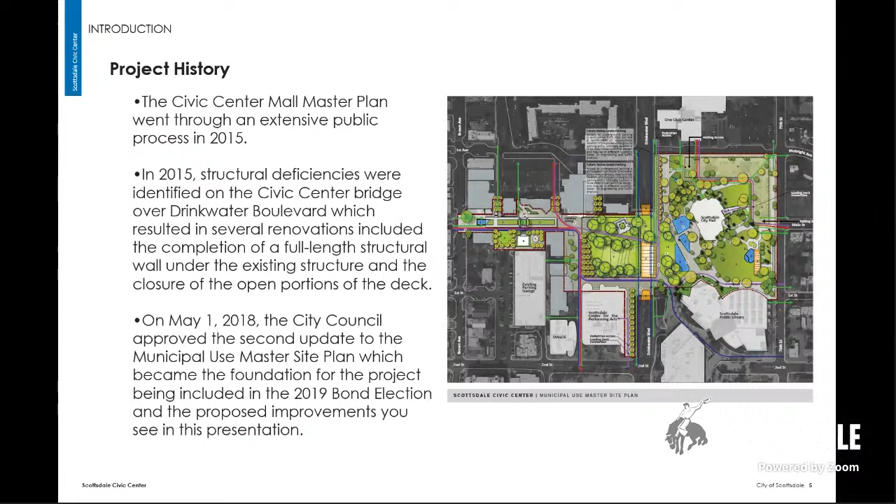Again, I apologize, we'll say next quite a bit in this presentation because there are a lot of slides, but felt it was important to give a broad overview of the project. From that municipal site master plan, there were principles that came out of that community engagement that we carried forward as design goals for this project. One was really to honor history and understand the significance of the current plan, of the institutions that call the Civic Center home. That includes the Scottsdale Historical Museum, City Hall, Library, Performing Arts, and all those institutions. And then combining this new infrastructure to support what will become an entertainment destination and a daily use park. Next slide, please.

I think this plays into the historic aspect of the park. When you try to understand a space that's existing, it has a life of its own already. It's important not only to look at what needs improvement, but also what's working well and what can be built upon. Our design team started with this approach of preservation and then enhancement, and then areas that can be completely transformed, really building on the great infrastructure of trees and architecture that exists on site.

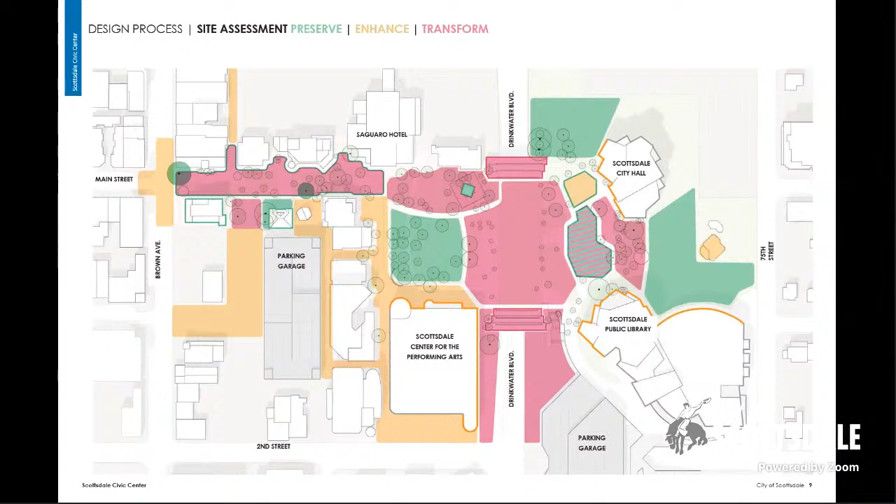As we looked at these study areas with the adjacent context and program, we broke the site down into 5 study areas. We'll briefly go over each one, and at the end we'll touch base in a little more depth on the West Paseo.

The West Paseo is that connection from Main Street into the West Bowl. The West Bowl is that area and lawn just north of the Center of Performing Arts. The Civic Lawn spans over Drinkwater Boulevard Bridge, adjacent to City Hall. Then a new family amenity area called the Social Hub is stitched in between City Hall and the Public Library, offering more family-focused daily activities. Finally, the East Bowl along North 75th Street is that performance and entertainment destination.

Just quickly to touch on the framework of the plan, it really took influence from these institutions that surrounded the Civic Center, engaging it with three main programmatic areas that played to the program and how to extend those institutions out into the space.

From the West Bowl with its connection to the Center of Performing Arts, the East Bowl with its connection to looking out the windows of the Scottsdale Public Library, and then the Civic Lawn that works to engage and tie together the civic nature of City Hall, the public nature of the library, and the art and cultural aspect of performing arts.

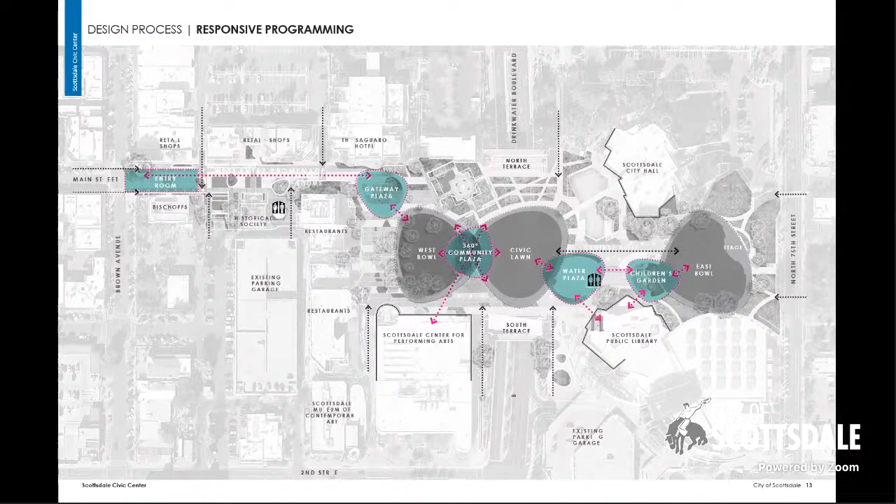From there were these other layers of program that responded to community desires: a children's garden outside the library to bring daily activity, water plazas, and community plazas that could be programmed in a variety of ways. As it pertains to the West Paseo, this entry room allows people to be pulled in from Main Street to create a gathering spot at that node.

Built on from that, around the Historical Society, is this extension of other adjacencies — looking at potential expansion of green space where that current parking lot is, where the schoolyard rectangle is located, and offering a formal gathering space outside of the museum steps, what we're calling the square.

As you get into the bigger park area, we're really reimagining that Marshall Gardens area with a Desert Southwest overlay, showcasing our native palette within the Botanic Gardens, and other social gathering areas that are adjacent to the institutions.

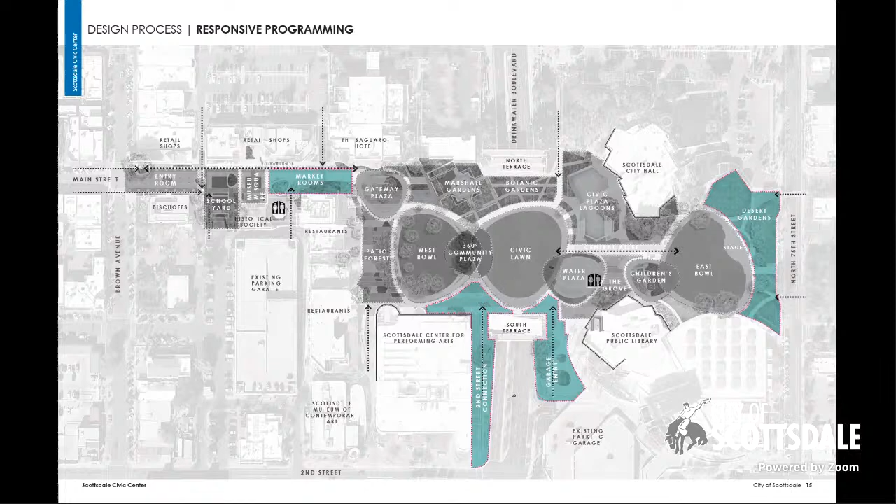From there, it was about connecting out. One of the main goals of this project was to increase those connections, both internally, but also enhance access externally from the park, both to the east, west, and also to the south, to the existing parking garage and 2nd Street.

Here you see the plan in its form as it currently stands, with those three programmatic areas anchoring the park. Their shape is taken and pulled from the turquoise gem, which relates into the arts of Old Town, allowing us to be organic with our moves and really respond to a lot of the existing elements that are out in the space.

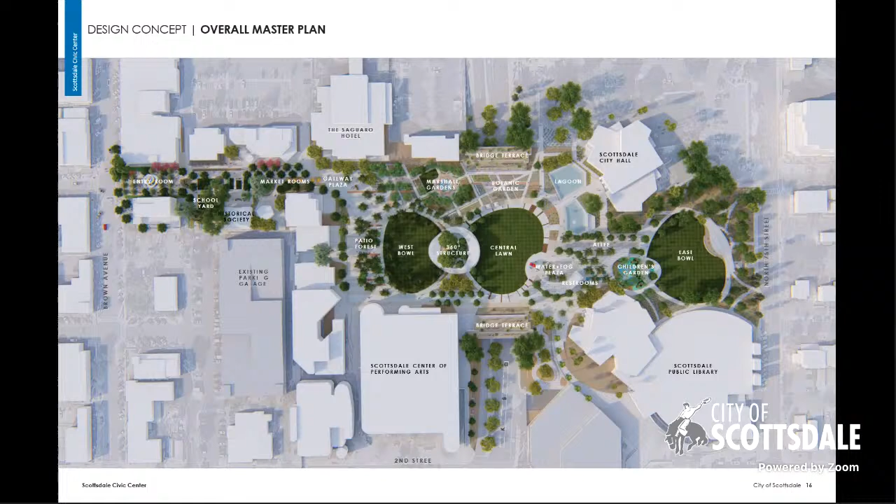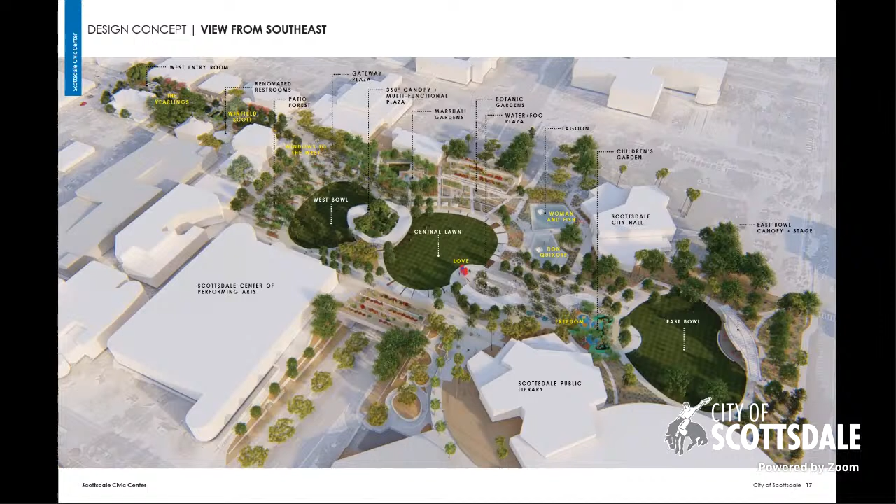Here you can see a view from the southeast looking to the northwest. It's a little hard to see on the screen, but we're currently working with Public Arts as well, looking at the refurbishment and relocation of several of the sculptures that exist today, as well as working with public artists on a bridge installation underneath the tunnel.

You can see here that the Winfield Scott Memorial is kept essentially within its same location and adjacency to the museum, actually aligned and centered on the doors. The yearlings are similarly located, just pulled back so they don't become a barrier, but instead create a focal draw back into the park.

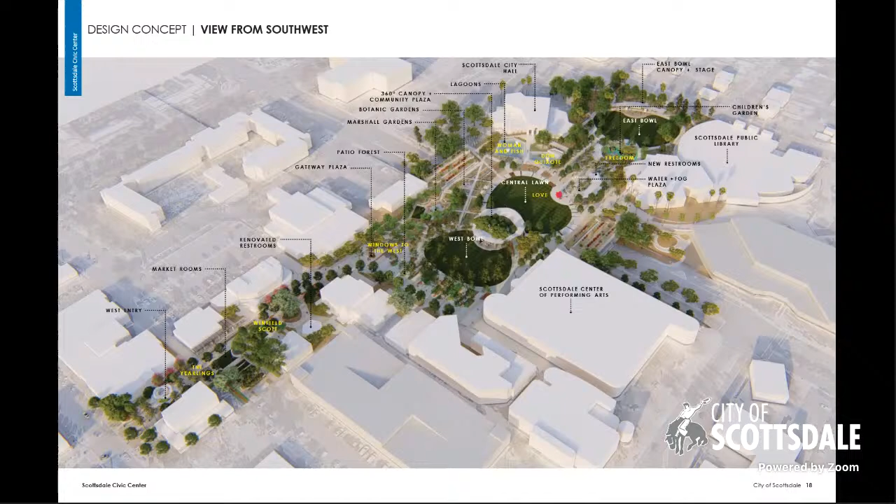So the West Paseo, we'll touch on the design goals here briefly, and at the end we'll get into more detail around the historical museum. The design goals for this space were really about increasing access, both visual, so from the corner of Main Street and Brown you understand there's a park beyond, something happening within the space, and that it would draw you in.

So the big move here was to really lower the grade, bring it back to its original road grade or parking lot, so as you access in, you're not met with ramps, barriers, or walls. You have clear and free pedestrian access. It also opens up a lot more opportunities for programming, from markets and festivals, to speaking engagements and lectures off the steps of the Historical Museum.

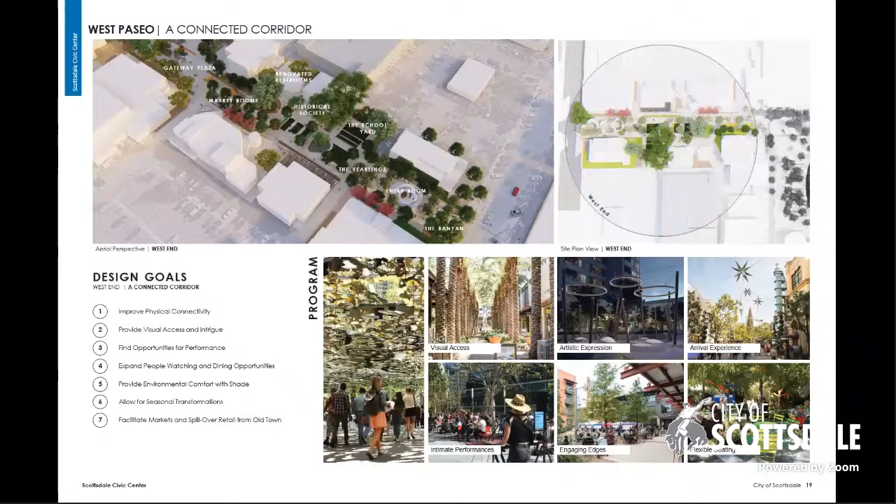As you move further east into the park, you come to the West Bowl, which was really about preservation of an amenity area that's working well. It's got the large forest of trees, a beautifully sculpted lawn, and this nice adjacency to the performing arts with that program relationship.

And then with the Marshall Gardens, it was taking that geometry and really working with it, but having this Southwest desert overlay to bring it to life, add more vibrancy and color, and showcase that desert palette. In the center, you see a 360 structure engaging with those existing banyan trees that anchor the center of the site, creating a dynamic community space right in the heart of the park that can activate the West Bowl, activate that civic lawn, and also create a great internal gathering area.

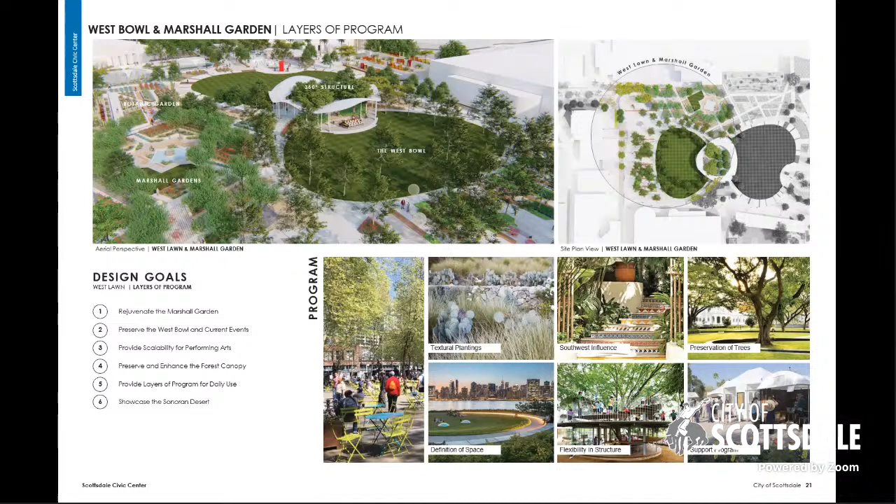Here's a shot of that Marshall Gardens with the step down. We were, within this design, opening it up to provide better visual access for this area, as well as better physical access.

So as you get to the civic lawn, this has that overall bridge connection over Drinkwater that stitches into City Hall. As you can see in the foreground of that upper picture, the lagoons are kept to maintain that view up to City Hall with the bridge, but they are reduced in size on the south.

That's twofold: one, water conservation was a big part of this project, understanding how we could reduce turf area, reduce the water feature, and solve maintenance issues through this project. That also opened up a large area south of the lagoons and north of the library that could be occupied with more community amenity areas like splash play, a reading garden, and a playground.

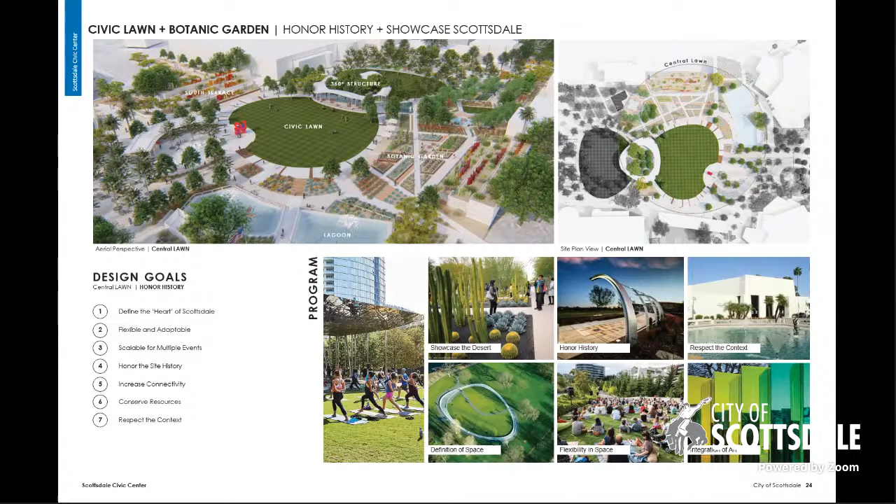So it has this formality that links and connects the east portion of the park to the central portion, which was a goal of the project, to make that connection a little better, because right now, with the grading and that bunker-like restroom, you're a little lost in understanding that an amenity exists on that side of the park.

So here's the social hub, really building off of the program of the library and letting that extend out into the space to become that great family gathering area. The library is looking at having that back entrance turned into a permanent entrance that spills out right into the children's garden. The children's garden would have a reading tree area, a place to grab a book and lounge outside, and have story times and those types of activities occur out there.

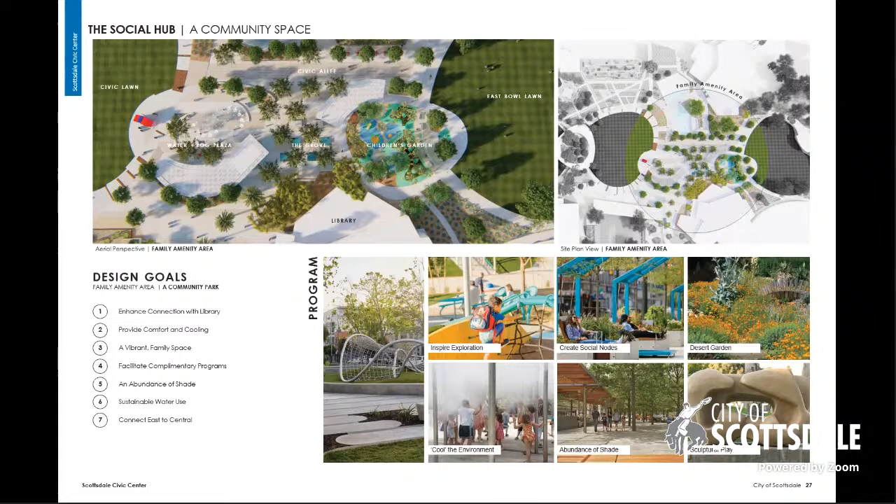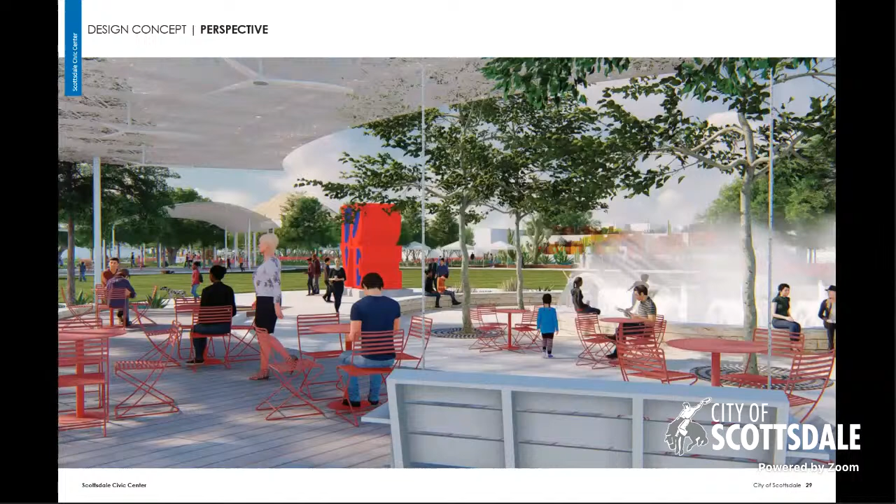And here's that spot underneath the shade structure with the water plaza to the right. You can see the terraces - we're looking at creating artistic bookends on those terraces that exist out today to bring some of that color and play with the great sunlight that we get in our Arizona desert. Here you can see from this vantage point the connection of the splash, the love statue, the 360 structure, and Camelback in the distance.

And finally, over at the East Bowl, this is really about creating permanence to a program that exists out there today - replacing that temporary stage setup with a permanent stage and canopy, transitioning from water use with the existing water feature to water collection. This whole entry off of 75th will be transformed into a more native desert palette. The performance canopy is actually designed to capture and collect water, filter it through the landscape, and become an educational opportunity for residents and visitors to understand water use within our climate.

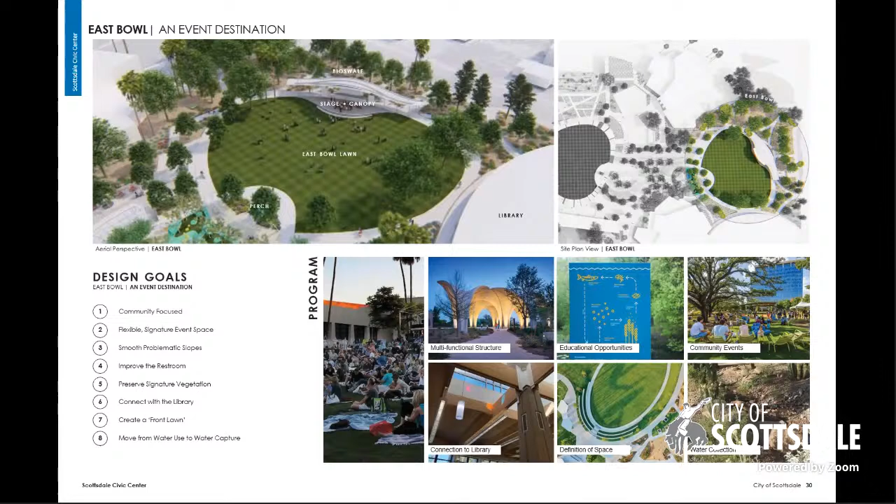There's also special attention paid to the scale of the space, as it's acting as a performance pavilion out to the green and towards the library. But on its backside, the 75th side, it's designed to not have a back - it scales down to the neighborhood to create a nice entrance experience that you walk through as you enter into the park.

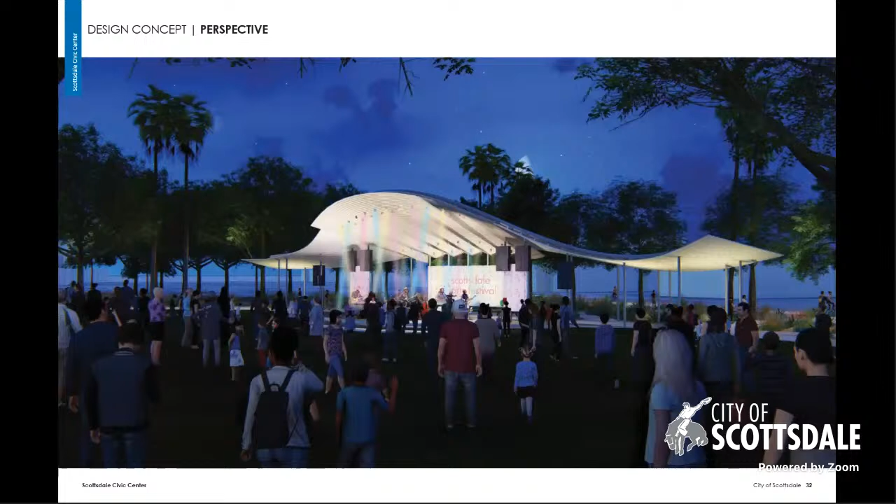And then it has this ability to transform from that daily use into this entertainment destination that can support those events. All right, so that was a quick overview of the entire thing.

And like I said, I apologize if I went fast. There's a lot of detailed information again, and happy to answer any questions after this presentation as well.

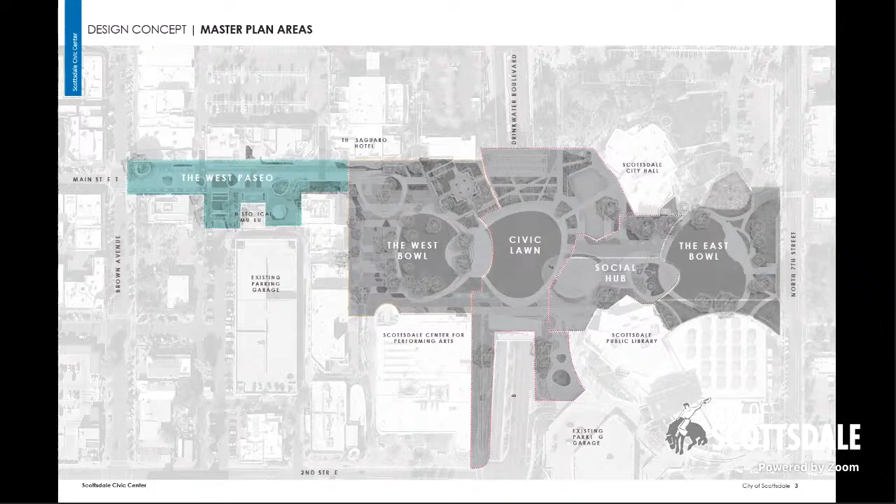But diving into the West Paseo - I apologize, some of the text looks like it's a little off - but this captures again that area from Main Street and Brown into the West Bowl area, and hugs the historical museum.

Here's an enlargement plan of that zone where you can see the Scottsdale History Museum with what we're calling a little museum square out front of the steps. This whole area is flattened, and the Winfield Scott Memorial remains in its place, but actually centered on the doorway.

There's an opportunity for expanded green space over to the west of the museum. The existing large trees right now will remain, that large eucalyptus to the right, and then the three large trees that kind of frame that schoolyard space.

And then what you see off of Main Street and Brown is this idea of an entry room, pulling that new Main Street landscape palette into the west corridor here, and creating a place to gather, a place for small performances, for buskers, for that daily activity that activates it, and those seasonal transformations that occur. So having seasonal lighting, having a place for the tree to set up, all those types of things would happen within that entry room.

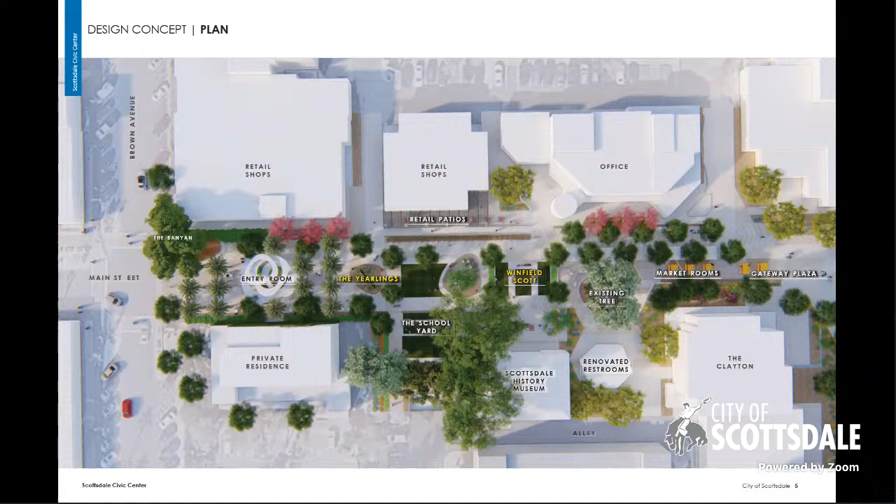And then you can see the yearlings also kind of pulled back, so still a visual draw from Brown and Main Street, but then also a nice connection from the steps of the museum, and also a nice visual tie to the parking lots to the north and south. So it's something to draw you in and welcome you into the space.

Next slide, please. Here you can see diagrammatically how those programs set up. You have this nice promenade that cuts through, that can be transformed into these markets and these different festivals. Given the new simplified ground plane, it really does allow for better tent setup, better vendor setup, better setup in general for those weekend activities. There will be Wi-Fi throughout the park as part of this, as well as plugins to help facilitate those vendors and those types of activities.

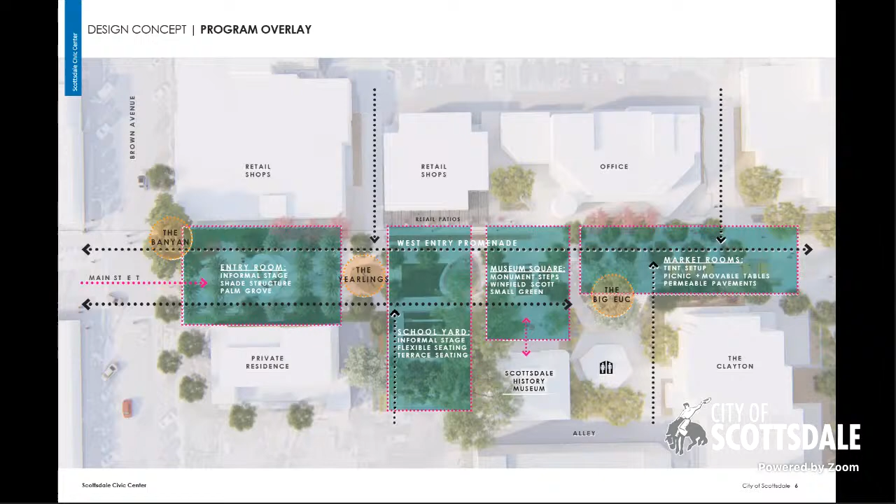Next slide, please. Here you can see in perspective how the museum fits into that space with these turquoise-shaped planters that dot through, that either highlight an existing tree, showcase a desert palette, or provide a place for art to sit, as you can see with the yearlings.

And then there's this little formal square out front of the steps of the History Museum that provides the area for tent setup and those lecture and other types of events that occur out front. And even with those steps, there'll be two ramps that flank the steps, allowing access from both the east and west, and allowing an accessible entrance up to those doors.

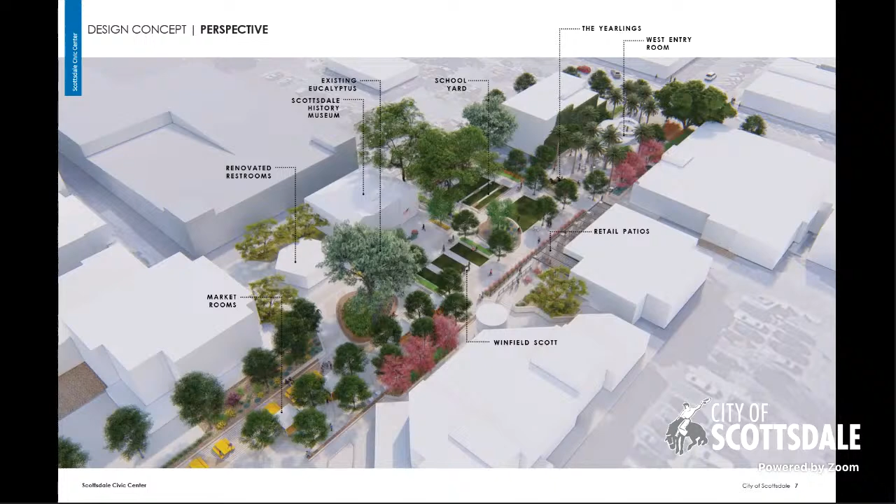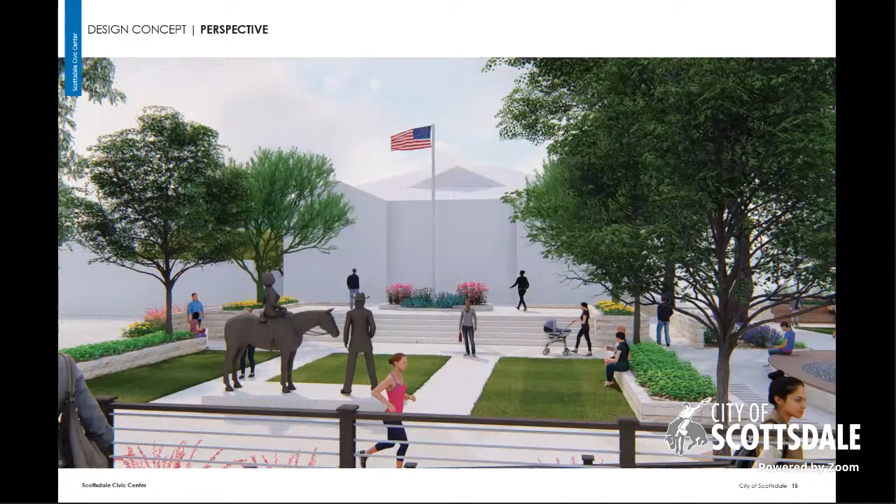Next slide, please. Here's a shot of basically standing over by the interior design store and the wine shop across the corridor, looking back at the museum with those steps up, and you can see on both sides you have ramp access that go up.

We were able to meet with a couple of the museum staff and committee members. I'm not sure if any of those folks are on today. And we were able to show, through visualization, how this would appear and how this would be transformed.

So from today's grade, you can see how this drops down about 3 to 3.5 feet. And really what it does, it brings the museum back to having that prominence that it once had. If you look at the historic photos of the steps, it actually does become that gathering space in front of the museum, which is nice.

For context, you can see the planting and the flagpole that exists today. And one thing that did come from that meeting with the Historical Society is understanding the programmatic needs for those small events that happen in front of the museum. So some of the turf that you see will actually be transitioned into permeable pavers to allow for a better tent and event setup floor for those things to happen.

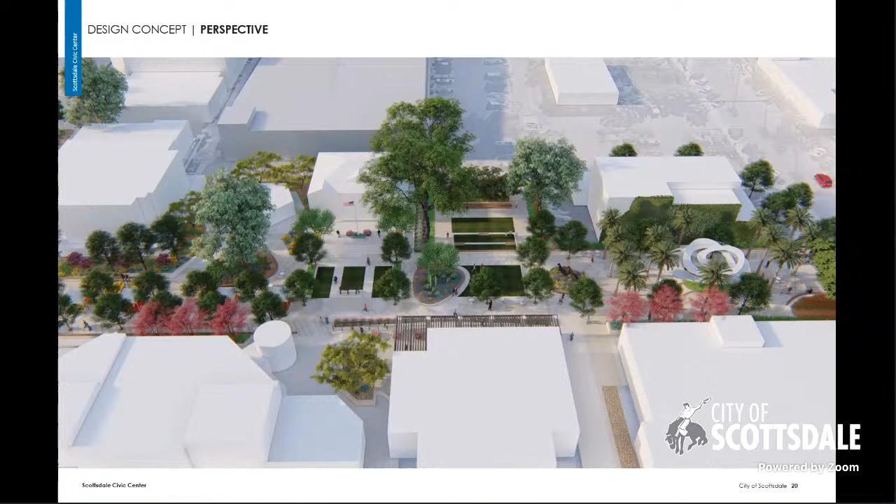Here's another aerial view of how those improvements would work with the existing trees framing that space. That is it for that section.

Now just a quick overview of the schedule. Right now we're in public outreach. Construction is scheduled to begin October 2021, with everything fully reopening by December 2022. Working with our contractor, we anticipate pedestrian access through this corridor being maintained through construction, as they flip-flop sides as they work through it.

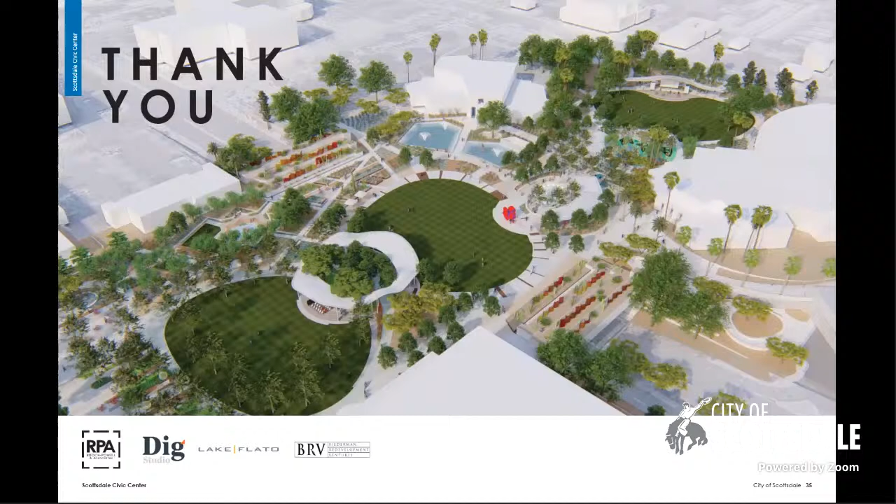I believe that is a wrap. I don't know if we want to go back to one of the slides showing the West Paseo entry, maybe the one with the overview or plan view. If anybody has any questions or comments, I'd be happy to take those. Thank you again for the time.

Commissioner Hosmer has a question.

I don't really have a question, more just a compliment, because going to that museum, I felt like it was the back door of something. The entrance off of Main was so congested. You've opened it up and celebrated the entry by putting a grand set of stairs up there, and I think it gives it a lot more importance. So I commend you, and it's nice to see that the 20 or 30 remodels that have happened to the Civic Center over the decades, this is pulling it all together, and I love seeing this.

Thank you. Thank you. Appreciate that.

Are there any other comments or questions from the commission? Okay, I see none. Thank you so much for such a wonderful presentation. It's very exciting. Thank you for taking the time. Appreciate it.

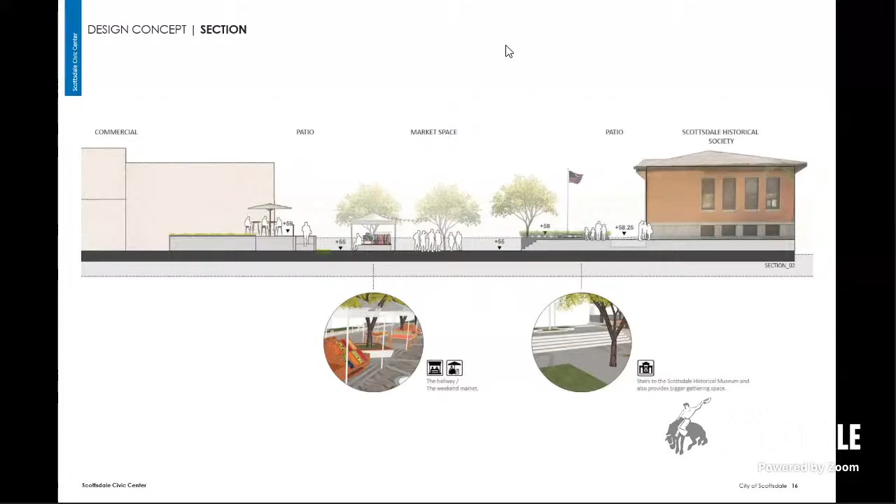Thank you, Historic Preservation Commission. This is Ben Moriarty, coordinator for this case. I'll give it a moment for the presentation to come onto your screen. Sorry, just a moment. Again, my name is Ben Moriarty, senior planner with the planning department, and I'm the coordinator for the Hall residence re-roofing case, number 48 HP 2021. Oh, there it is. Perfect, thank you Karen.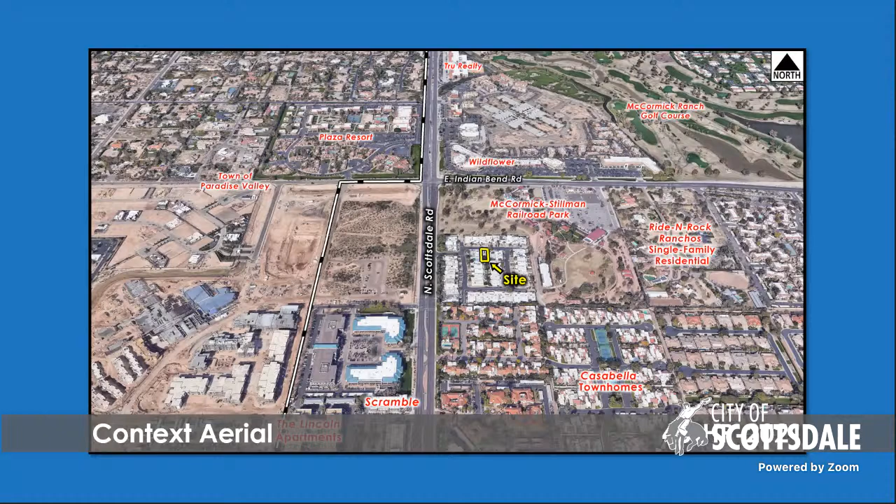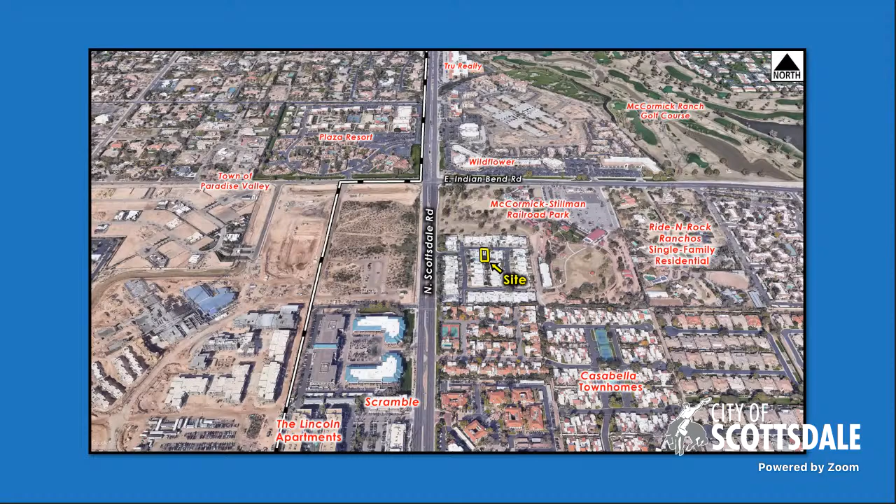This slide shows the aerial of the site. It's within the Sands North Townhome development, south of East Indian Bend Road and east of North Scottsdale Road. You can see the McCormick-Stillman Railroad Park wraps this development.

This is a closer bird's eye view of the site. Just west of it is the community building and pool for the Sands North townhomes.

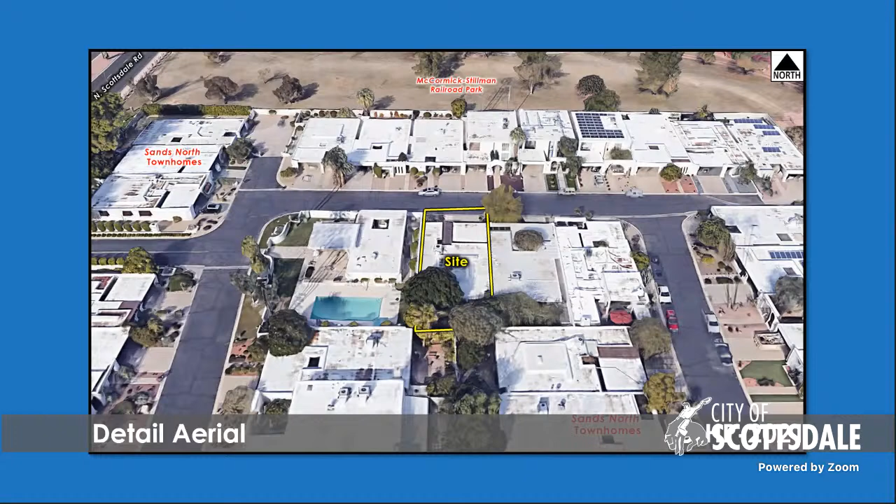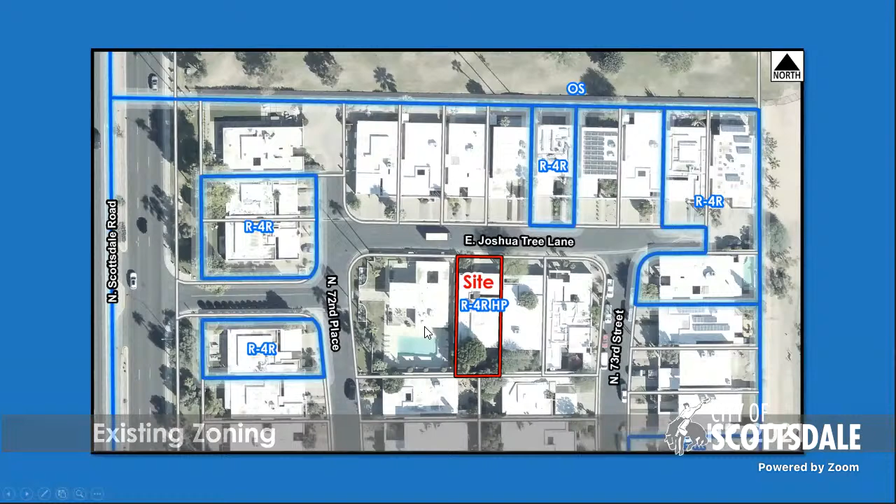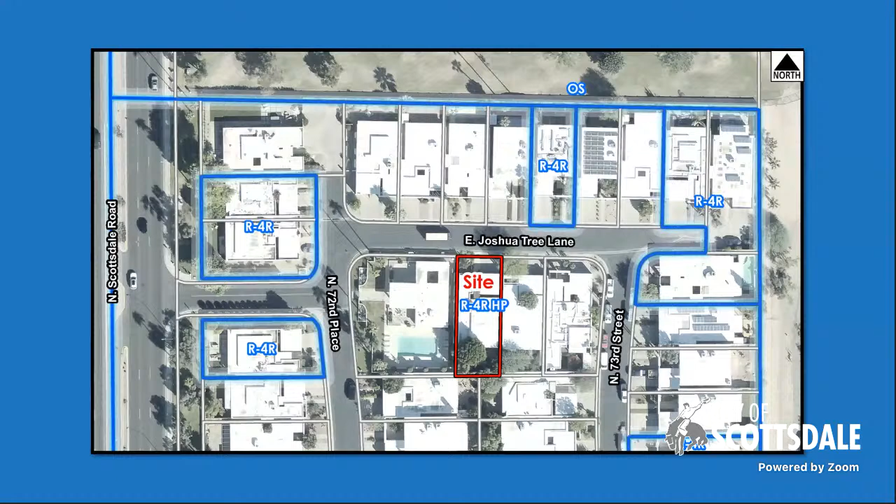The site is zoned townhome residential with a historic property overlay, or R4R HP. You can see it's on the south side of East Joshua Tree Lane, between North 72nd Place and North 73rd Street.

The applicant received two quotes for the re-roofing project: one for $3,430 and the other for $6,552.88. So the request before you today is for the certificate of appropriateness for the re-roofing project and the HRER program funding.

That concludes staff's presentation. The applicant is also on the line if you have any questions regarding this project. Thank you.

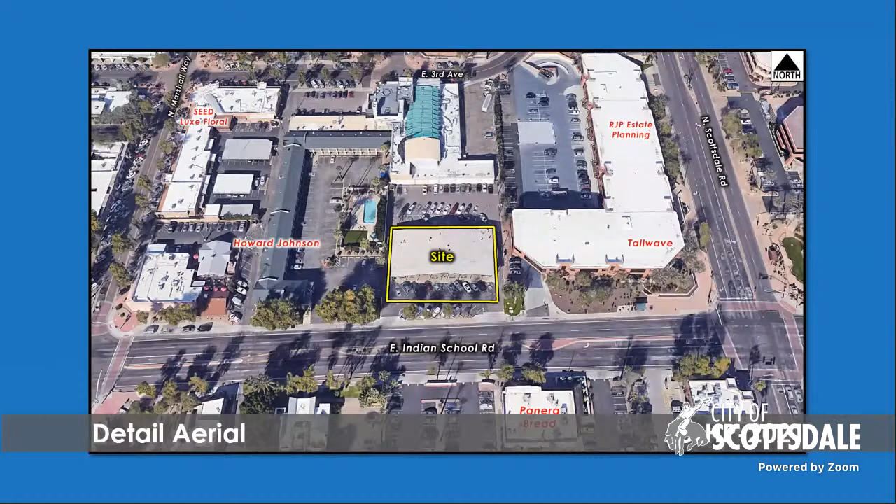Next slide, please. The site location is on the north side of Indian School Road, west of Scottsdale Road and east of Goldwater Boulevard. Next slide, please. This is a closer look at the site. It's part of a larger development that includes redevelopment of the Howard Johnson Hotel to the west, as well as the venue building to the north. The specific Kimsey building, highlighted in yellow, is the subject of the plan tonight, which recently received a historic preservation overlay.

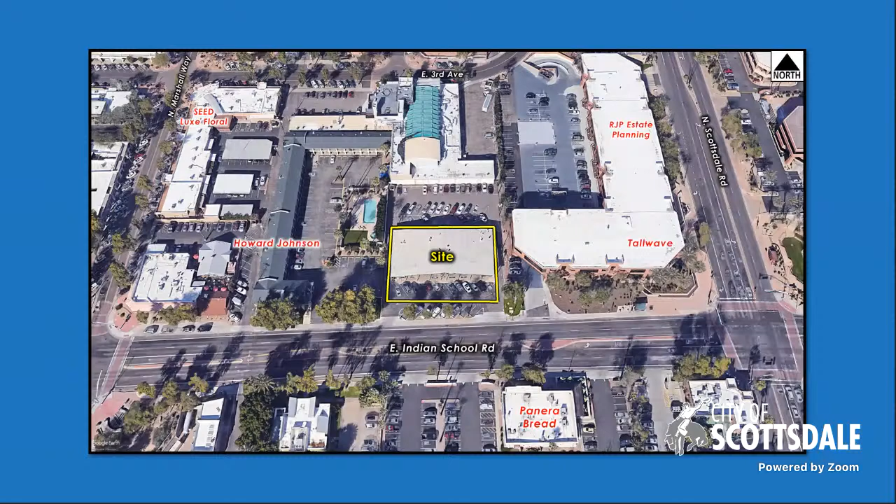Next slide. So the specific request tonight is for approval of the historic preservation plan and design guidelines for the Kimsey building, located at 7110 East Indian School Road.

Next slide. Earlier this year, on February 2nd, the Historic Preservation Commission reviewed the case and recommended approval of the historic preservation designation, as well as the draft historic preservation plan presented at that time. Then on April 6th of this year, the City Council approved the historic property designation, along with that draft historic preservation plan.

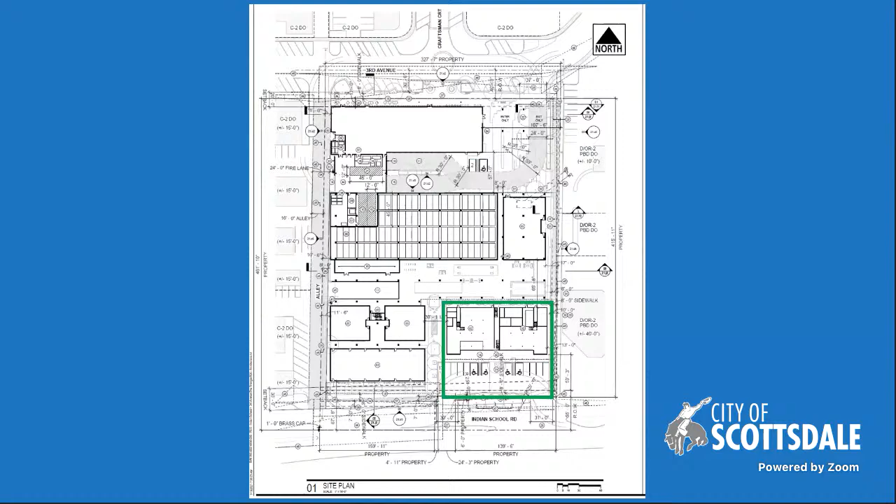Next slide, please. So before you this evening is the historic preservation plan, which has been provided in its entirety as part of your packet.

And the applicant will be going into a little bit more detail as to the contents of the plan. In accordance with the historic property overlay, the historic preservation plan is coming before the commission for final approval and adoption of the historic preservation plan.

That concludes staff's presentation. As I mentioned, the applicant has a presentation prepared, and I'd be happy to answer any questions you may have for staff. We'll go ahead and listen to the applicant presentation at this time.

Doug Sydnor here. Can you hear me? Yes, we can. Thank you. Okay, we'll go ahead and proceed.

Well, thank you, Chair Schweiger and Commissioners for having us here this evening. I am Doug Sydnor, an architect representing the Kimsey Development Project team, and specifically the architectural consultant of Gensler and Sydnor. Joining me today, and co-presenting, is Don Ryden of Ryden Architects, a firm specializing in historic preservation projects and consultations throughout Arizona for over 40 years. Don and his team is the lead author of the Kimsey Historic Preservation Plan and Design Guidelines that we will be discussing.

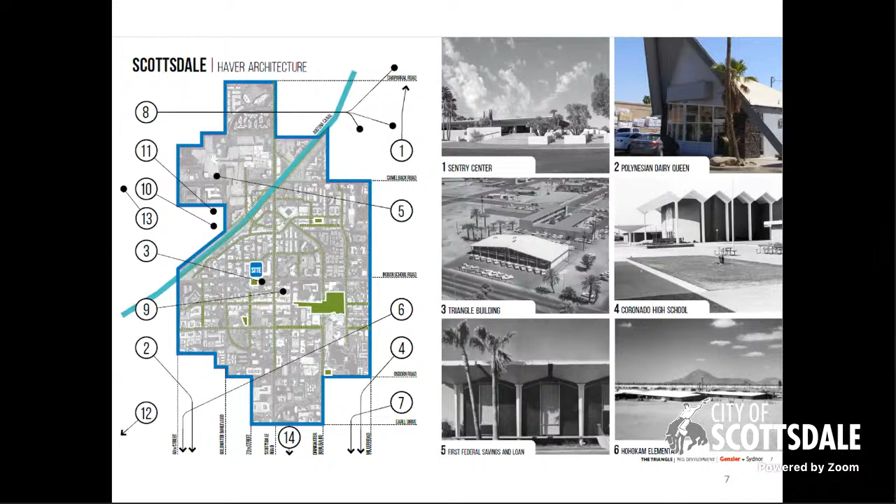We also took a look at the surrounding context to take an inventory of the architectural character and the palette of materials that were being used, so that we might consider all of those in the new redevelopment project.

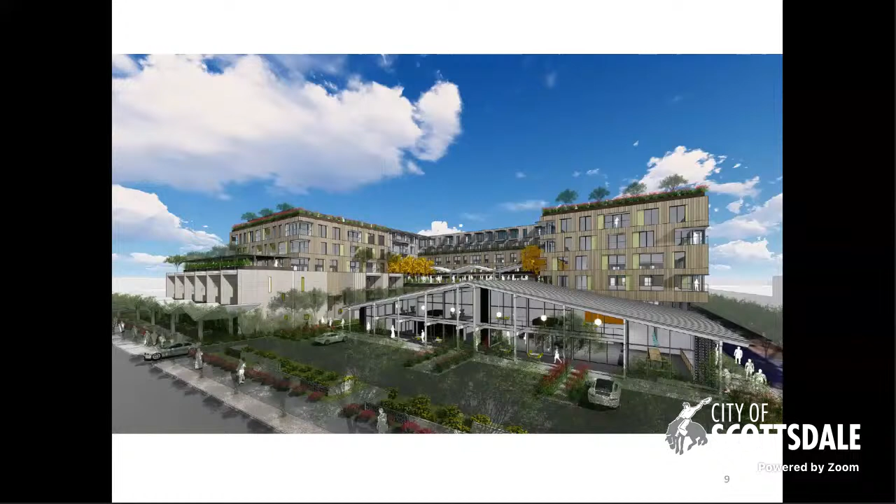Also wanted to bring you current with our latest rendering, which shows the Kimsey building here in the foreground and the new residential to the left of it, as well as a backdrop to the historic structure.

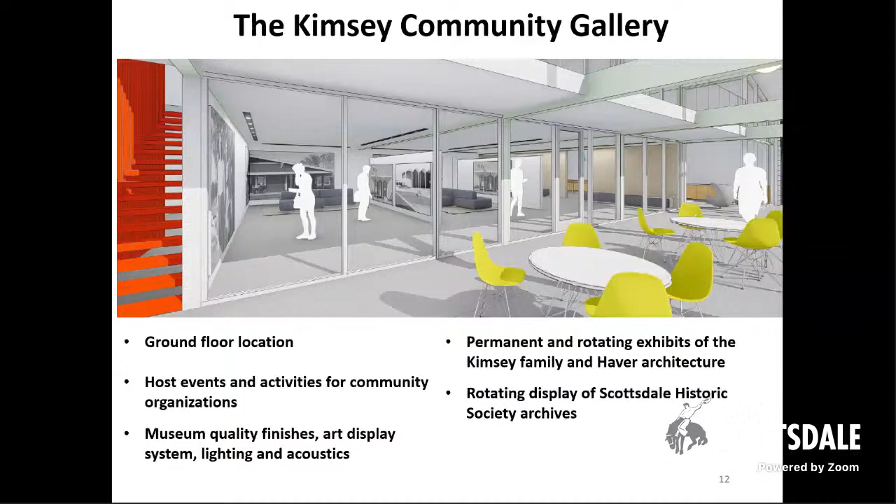This is just a quick image that we produced. It's about 1,000 square feet, on the first level, on the east half of the Kimsey building, and it will be publicly accessible and open during all the regular open hours of the development. There'll be rotating and permanent exhibits that particularly focus on the Kimsey family and Haver architecture within that space.

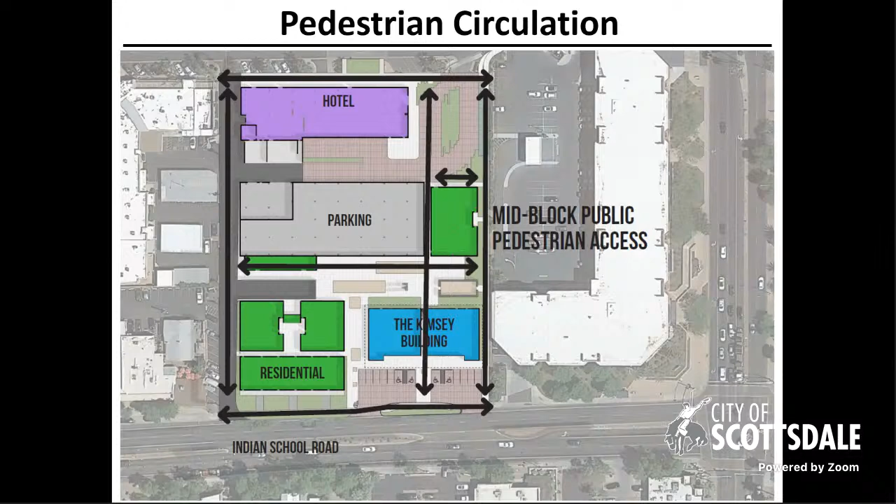Also, just a reminder of the conceptual site plan that's been evolving. There's been some refinements since you saw it last. The hotel in purple has shifted a touch to the south, and then there have been many other refinements. And of course, the Kimsey building is noted there in the blue.

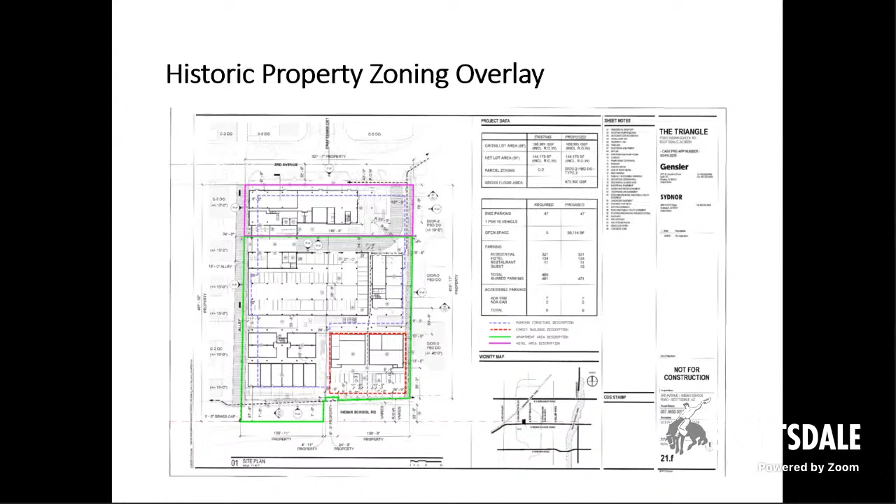And as Mr. Clough had shown, we're showing in this site plan drawing to the lower right, the southeast corner, the red dashed line, which defines the historic property, which includes, again, the footprint of the historic building and the open space in front of it.

At this time, I'm going to hand off the presentation to Don Ryden to kind of walk us through the highlights of the Historic Preservation Plan and Design Guidelines. Don? Thank you very much. I appreciate it.

I'm very glad to be here to share with you the findings of our investigations and the predictions for the future. As you probably all know, historic preservation plans are really not about freeze drying buildings in the past, but it's really more about respectful change management today for continued use tomorrow. People involved with renewing important old buildings have lots of different interests, risks, goals, and responsibilities, and yet they really do have to come together and agree about the treatment of buildings within nationally accepted preservation principles.

So we've created this historic preservation plan and design guideline document as a vehicle for understanding, planning, evaluating, and succeeding in rehabilitating the Kimsey building. Our archival research, our building assessment, and the code check that we performed has informed the preparation of this document. Its guidance is going to comply with the Secretary of Interior's standards, and it's interlocked with the International Building Code as mitigated by the International Existing Building Code.

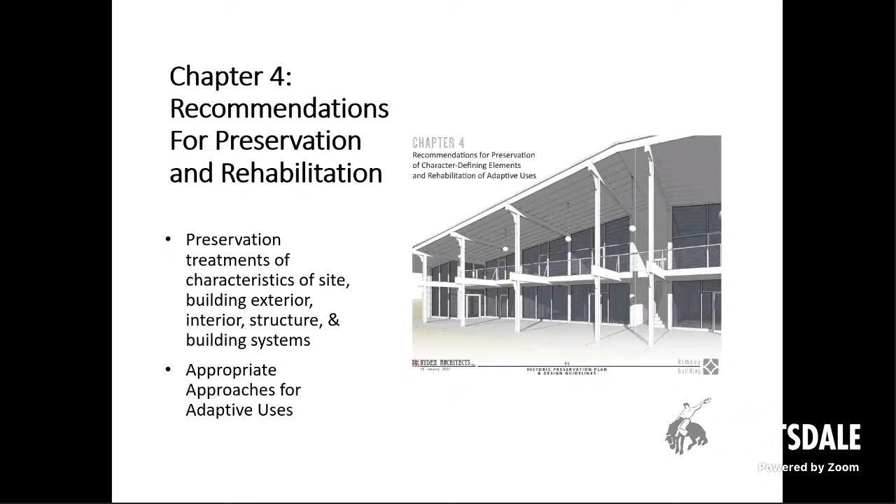The recommendations address each element of the site: the building exterior, interior, structure, and building systems. Preservation treatments will stabilize features, repair or replace deficiencies, and replace missing parts. Rehabilitation approaches will explain the appropriate modification for adaptive uses through additions and alterations.

So please join us in promoting the Greater Kimsey Residential Hotel Development Project by approving our Historic Preservation Plan and Guidelines as the legal document that will assure sensitive change management now and in the future. Thank you very much.

Thank you so much, Mr. Ryden. Are there any questions from the commission? Commissioner Hosmer.

Commissioner Hosmer, do you have a question or comment? Yes, this may be a question for Mr. Ryden. It's pertaining to the schedule. The DR and construction schedule that was mentioned in the beginning of the presentation, was that for the entire project or just for the building that we're talking about this evening?

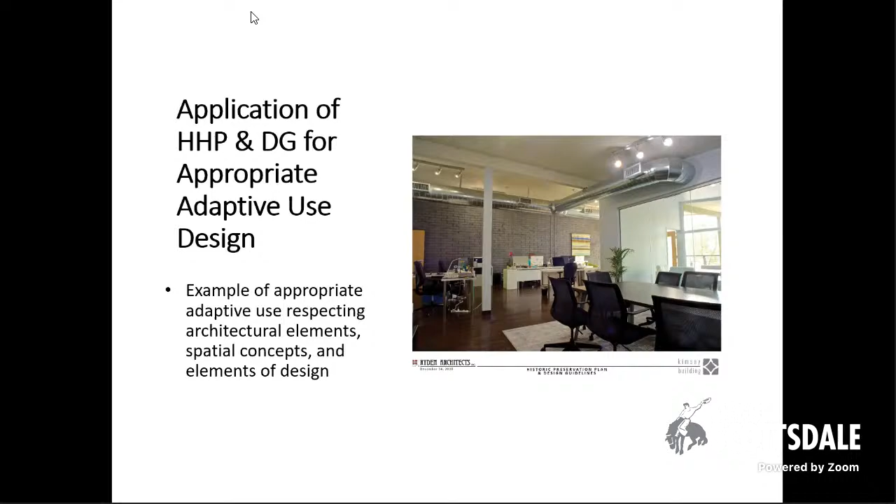Thank you so much. That was a very great presentation. We appreciate your time. Thank you so much for the approval. Thank you very much.

Okay, that takes us to agenda item 7.

Karen, is there a presentation on this, or is this just for discussion? There is a presentation. Are you not seeing it? I wasn't sure, so I just thought I'd ask. Is there something on the screen right now? Yeah, I can see Scottsdale North. Perfect.

Hello? Hi, Roger, I'm here. Okay, I can hear you now. Yes, whenever you're ready to begin, please do.

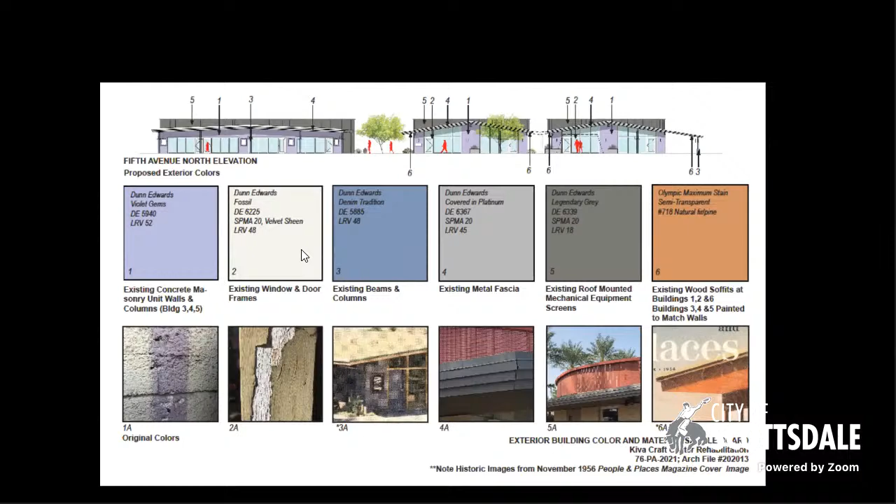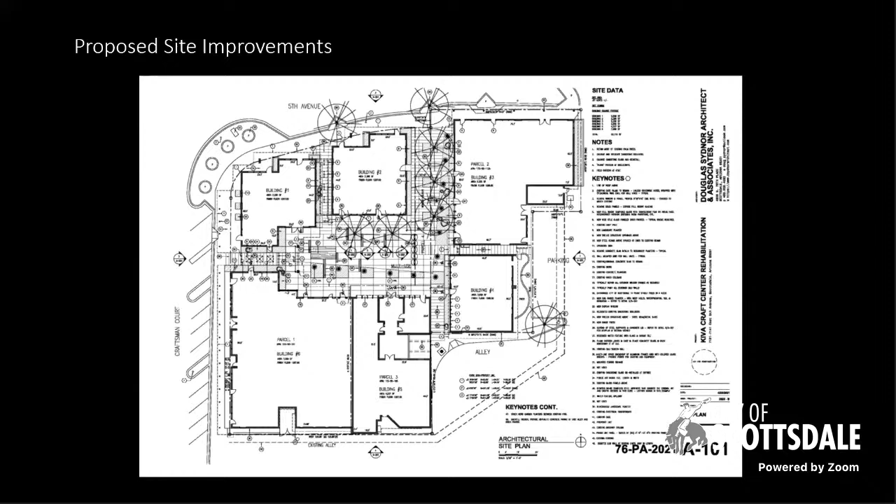With time so short, this is our proposed site improvement—I can't begin to dive into it, it'll take too much time. So let's go next to Donna's comments about the nomination. Donna, next. Very good, thank you, Doug.

This presentation is really our request to the Commission for support of our National Register nomination. The Simonson family, as owners and stewards of this community treasure, want to honor the Kiva Center by listing it on the National Register and preserving it in compliance with the Secretary's standards.

We begin with the historic context of Scottsdale in the 50s—a context of commerce and contemporary arts, crafts, and fashion. What was going on was a competitive yet complementary tussle between Old West nostalgia and modern sophistication, both serving as draws for destination tourism.

The significance of the place is that it's important in commerce as an innovative business model by entrepreneur Lloyd Kiva. It provided experiential shopping and a gathering place, and uniquely, it was a place for producing, purveying, and promoting modern arts and crafts of the Southwest.